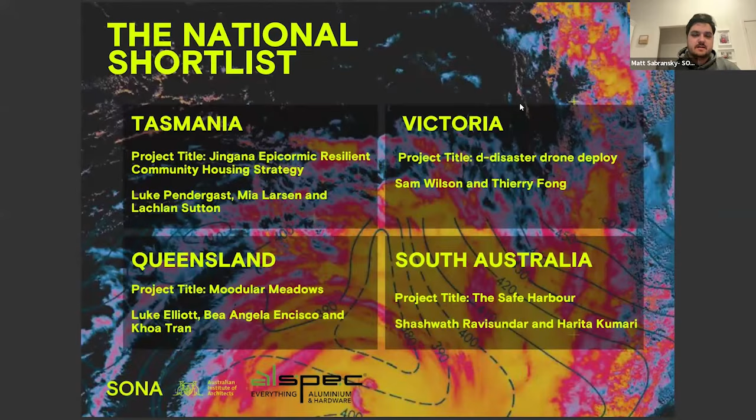From Tasmania, we have the Jingana Epicormic Resilient Community Housing Strategy from students Luke Pendergast, Mia Larsen, and Lachlan Sutton, all master's students at the University of Tasmania.

From Victoria, Project D, Disaster Drone Deploy, student Sam Wilson, a master's student from RMIT, and Thierry Fong, a master's student from the University of Melbourne.

From South Australia, we have Safe Harbour from Shashwath, Ravisundar, and Harita Kumari, master's students at the University of Adelaide. And finally, from Queensland, we have Moodular Meadows from students Luke Elliott, Bea Angela Encisco, and Khoa Tran, all students of the Queensland University of Technology.

The way that this session will run is each of the shortlisted teams will now have 5 minutes to present, plus an extended time of 5 minutes for jury feedback and Q&A. The order of presentations will be randomized, and following the presentations, the national jury will deliberate, so we'll be put into a separate room. If you could just hang around, we'll then come back to announce the national winners.

So our first team up to present is Tasmania with Jingana Epicormic Resilient Community Housing Strategy. I'll pass on to the students from Tasmania. One thing I did forget to mention is, because this is a new way that we're doing it this year, we still haven't worked out some of the kinks. So to access your slides, just ask to go to the next slide, and Madeline from the Institute will flip the slides for you back and forth. Thank you.

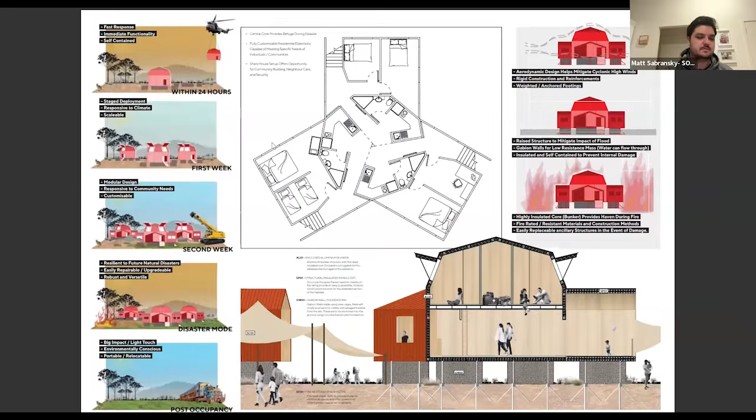Were there any other comments from the jury? No? Awesome. Great job. In that case, we'll move on to our next project, which is coming from Victoria, Disaster Drone Deploy.

Disaster Drone Deploy.

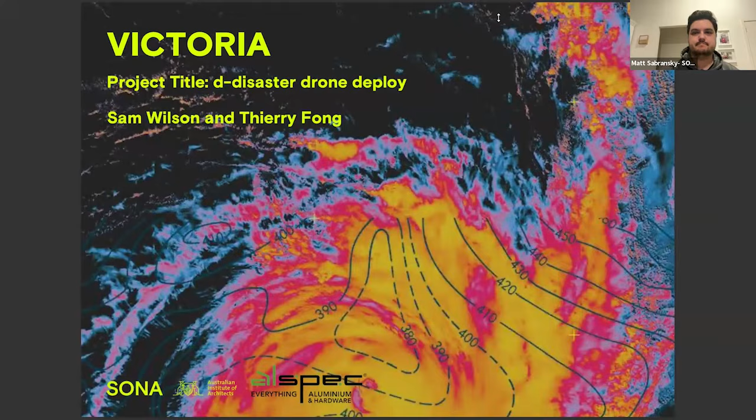Hello everyone, my name is Thierry and this is Sam, and welcome to our provocation, D. D rejects the conventions of architecture as a singular static object and looks to the dynamic and contemporary, the non-architectural typology of drones.

D posits a remedy to the adversity of extreme climatic events that manifests as a deployable system composed of airborne pods. D can be deployed anywhere to provide urgent shelter and emergency housing to displaced communities.

D is composed of one typology, symbiotically forming an accretive urban mass. D is a flock of birds, a school of fish, a hive of bees, restorative to the ecosystem, a system to remediate disaster-ravaged landscapes. The analysis of recent disasters above the Tropic of Capricorn determines Longreach as a location that bears all three of the scrutinized calamities.

On the traditional lands of the Iningai, Longreach is prone to regular flooding from the adjacent Landsborough waterway, the omnipresent threat of bushfire from the southwest Salton Creek forest, and the perilous westerly wind and developing La Nina.

A devastated family, despondent, desperate and dreary, no longer have a home, their livelihood lost to the forces of nature. As they arrive at Longreach to alleviate their displacement, they see a swarm of drones simultaneously arriving. Hope is inspired. They will have a roof over their head tonight.

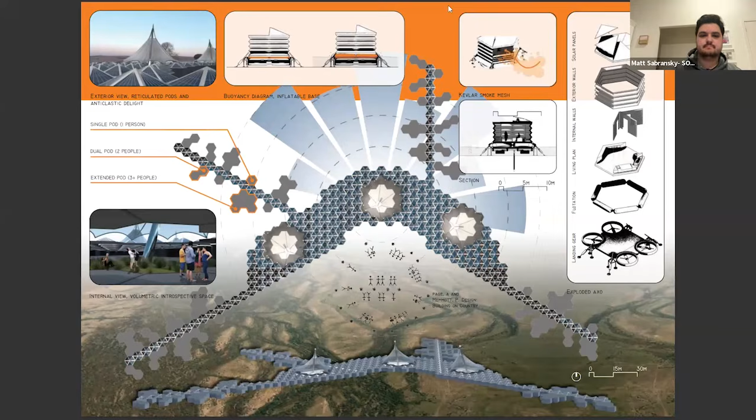Thank you. Again, I'll pass on to my national jury. I'll start. Can you hear me? Well done, I think.

It's a really innovative concept. One of the things I wanted to ask about, similar to the previous question I had for the other team: how did you come up with the form in response to the logistics of a flyable object? In terms of the form, the hexagonal shape was driven by a biomimetic approach. We looked at the analogy of a hive of bees or insects, and the hexagon as a form is easily tessellatable into the overall spatial arrangement of the site. In terms of aerodynamics, the multiple edges along the hexagon mean that typical drone components, such as the four turbines and the flotation devices borrowed from a lunar capsule, can easily be placed. Those were the main drivers for the form.

When these hexagonal forms come together, they orient themselves in a way that creates shading and a windbreak on site. The idea is that wherever these drones are deployed, their form can change in response to the windrose data, so it's dynamic and depends on site. But in terms of Longreach, this is the configuration.

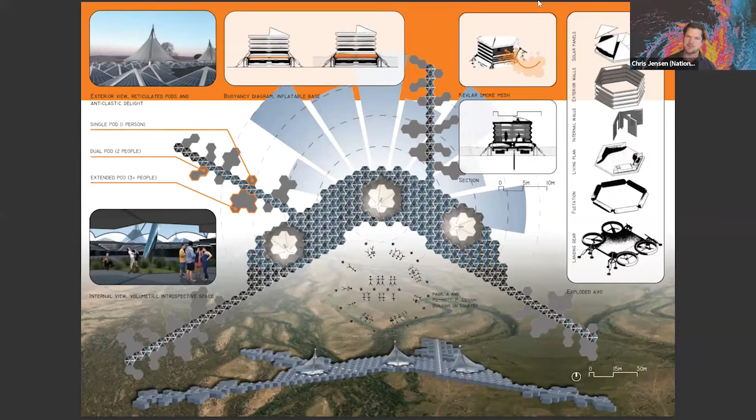Very creative. I'm wondering, did you consider the possibility that the drone would deploy the accommodation and the actual drone itself would return somewhere? The reason I ask is that's probably the part most vulnerable to further extreme weather events, so I'm wondering if that was considered in the design. Is your question whether an alternative would be the drone deploying the living unit separately and then departing the site?

So if you look at the illustration on the right, the base, which is the drone, I just wondered if you had a thought of it being to deliver the habitable structure and the drone part returns. I was just interested if you had a thought of that as one of the possibilities, that's all.

Yeah, we definitely went through different ideas during the design process of how this deployable system would operate. We settled on the idea of the drone being a comprehensive living unit because we wanted to integrate resistance to different disasters throughout the entire form of the drone, from the landing gear also being a structural element to elevate the drone above the floodwater level, to aspects like the turbines folding in. As Thierry said, this is as compact as possible, but the entire creation actually depends on how many people require the pods, so it can change in size instantaneously.

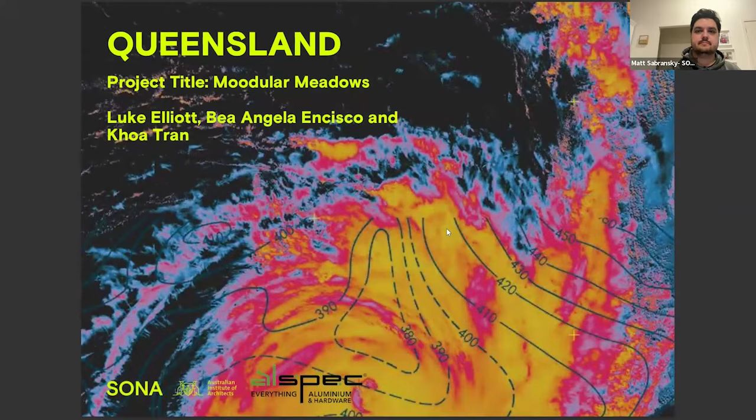Hello everyone, we are T-Lab. I am Bea, this is Luke, and this is Khoa. Situated just north of the Tropic of Capricorn is the regional town of Rockhampton, where our communal modular hub, Moodular Meadows, resides. Rockhampton is home to the Darumbal people, with a significant family demographic and ample livestock, resulting in many people relying on cattle for a living, naming it the beef capital of Australia. Given the coastal location of the site, Rockhampton locals are often affected by harsh cyclones, torrential rain, and extreme bushfires throughout the year.

To combat this, we have been inspired by the Darumbal people's symbolic water lily to reimagine emergency housing by not only catering to the physical needs and wants of families, but also their emotional and psychological comfort. Growing up around the area, we wanted to emphasize the communal and gathering components, like the water lily, as we understand that in critical and emotional situations, regional towns often rely on each other to get by. So modular pods are customizable through meadows of 4, 8, or 12 people.

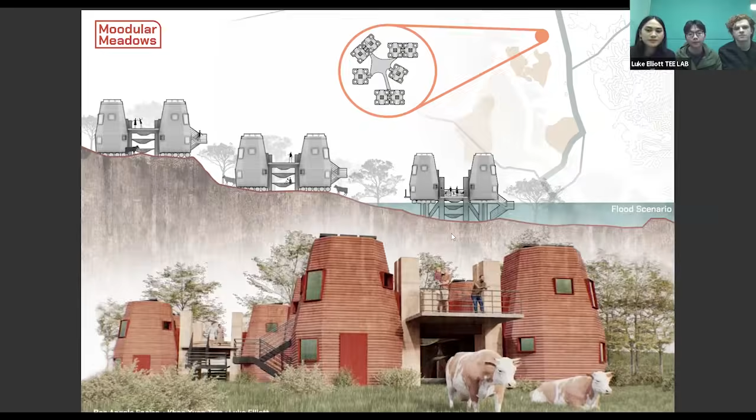The pods can accommodate family or couple lifestyles, pet accommodation, produce growing, and even livestock care within the rural villages through the customizable rooms. Communal gathering platforms where families can spend time and gather. There are also nets in the center for seating or as a quick escape for emergency situations.

We refuse to have an anthropocentric design, as we believe that animals are just as important as humans to connect on sacred Darumbal land. This includes the locals' livelihoods, where many farmers rely on the iconic Brahman bull to make a living. The effects of spontaneous weather conditions mean that livestock are often disregarded in emergencies and left behind in critical situations. We envision that even in the worst situations, families and farmers will have the opportunity to protect even a fraction of their pets and livestock, as opposed to none at all.

The Brahman bull's resilience has inspired us to develop our concept based on their ability to adapt to extreme weather conditions, withstanding heat up to at least 103 degrees without harm. What is also really resilient is cow poo. The large cattle population in Rockhampton results in a large amount of cow manure created.

We can harness this existing natural material to create a sustainable and resilient structure. We will create a composite material consisting of chemically treated cow patties to make them odorless, local soils, waterproof linings, and layers of insulation that will protect the cows and the people from the harsh winds, floods, and bushfires. The modules can then be 3D printed at the site much faster than any traditional building methods.

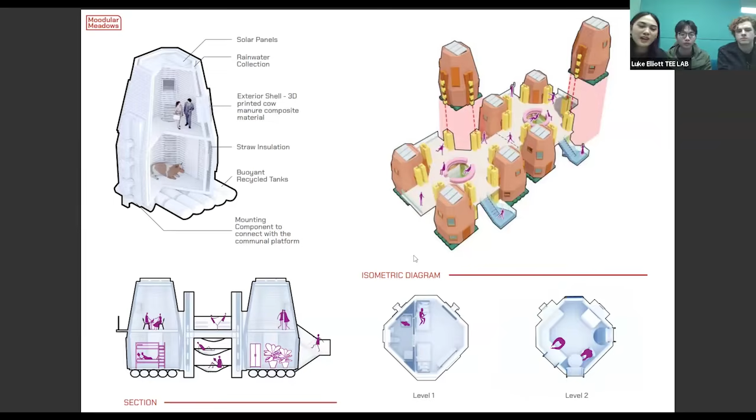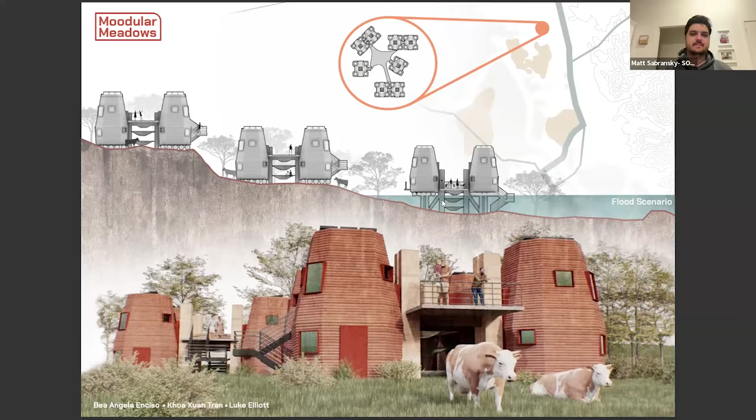Thanks, guys. And that brings us to our final team from South Australia, the Safe Harbor.

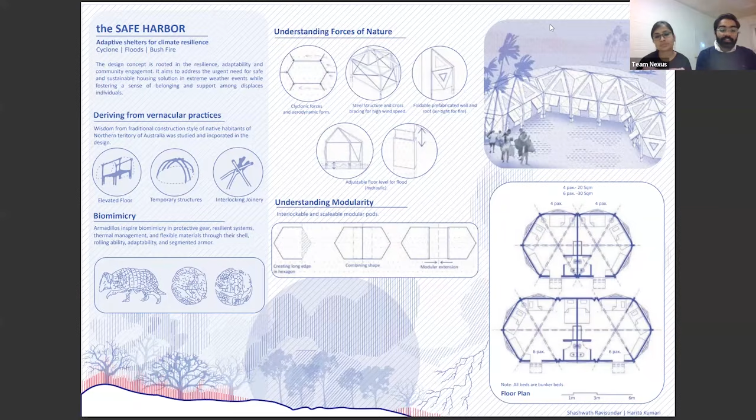Hello everyone, I am Harita and this is Shashwath representing South Australia at Nationals of the Super Studio hosted by Sona. We are both studying our masters at the University of Adelaide and excited to share a proposal for this year's competition. When we received the brief, Shashwath and I began exploring how mankind has dealt with natural disasters over the last 300,000 years. This led us to research the resultant architectural strategies of the Northern Australia's early inhabitants.

As shown in the illustration, we discovered that these communities elevated their homes to allow floodwaters to flow underneath, used aerodynamic forms to withstand cyclones, and created temporary structures for easy relocation. Crucially, the settlement patterns fostered a strong sense of community, enabling them to face disasters together.

But humans aren't the only ones with solutions, are they? The armadillo, for instance, curls into a ball for protection, inspiring a design of foldable prefabricated panels for easy transportation. Before we go any further, are you guys curious about the illustration below?

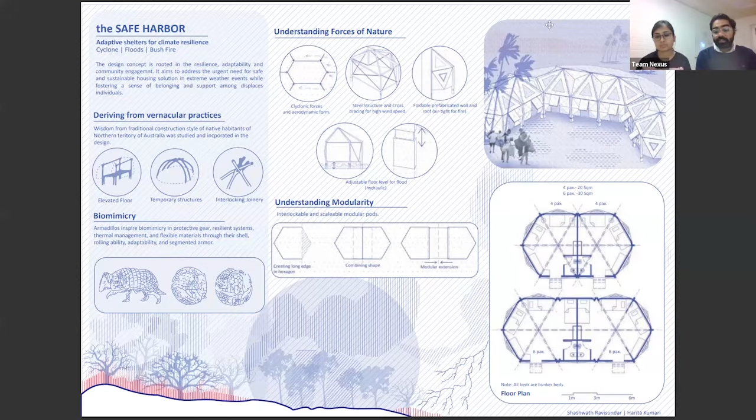We both were baffled to find out that in Australia, bushfires and thunderstorms can occur together. The intense heat from the fires causes the air to rise rapidly, forming storm clouds. These storms can produce lightning, which may ignite new fires and worsen the situation.

So going further into the design, understanding the force of nature was critical. We opted for symmetrical aerodynamic forms to counteract cyclonic forces with a steel structure and cross bracing for stability. The structure is designed for minimal ground insertion but strong lateral resistance. Rising floodwaters required adjustable floor levels - we incorporated hydraulic lifts inspired by car park systems to elevate the building, powered by solar panels on the rooftop.

We used foldable prefabricated panels for the roof and walls to achieve sealed joints. This helps in keeping out smoke as shown in the diagram on the left. The panels are made from cement boards with recycled aggregates and agricultural waste, reducing the carbon footprint. Foam insulation is used as a sandwich material between the boards to provide higher fire resistance.

For modularity, we chose an elongated hexagon split into two pentagons, allowing for expandable floor plans to accommodate varying family sizes. As seen in the plans, the modules can be used to house 4 people within 20 square meters or 6 people within 30 square meters. The design includes essential amenities like pantry, storage, and toilets. Most importantly, the structure symbolizes strength and comfort, ensuring a sense of safety. Next page, please.

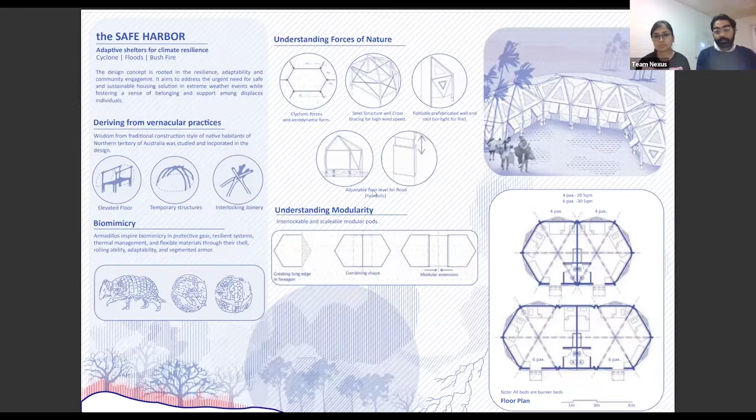So assembly is simplified for quick setup. A team of 4 can assemble the prefabricated kit in about 4 hours.

The rafter is connected to the telescopic column and is further attached to the base, forming the skeleton of the structure. Critical components like foldable beds and pop-up toilets are easily installed. The roof structure collects rainwater and all components fit into a compact, easily transportable box.

No skilled labor is required in this simplified process. This allows the inhabitants to create interlocked, scalable modules themselves and foster a sense of ownership.

We also focus on site selection for the disaster relief. As a demonstration site, we chose James Park Sporting in Cairns, Queensland, a region prone to multiple calamities. Being centrally located in Cairns, the site has existing amenities such as water supply, electricity, toilets, and floodlights.

The section through the site illustrates the wind shadow area between the bund and the trees as natural wind barriers. Furthermore, we ensure that the slope gradient of the site doesn't exceed 2 to 5%, ensuring a gentle slope to take away rainwater. These factors made it an ideal location for the community.

Fostering hierarchy of open spaces, the clusters are organized around a central shared space to encourage communal healing and activities. The organization of clusters is inspired by the hive of bees, with over 4 clusters. Each cluster houses 25 people, establishing a settlement of around 100 people. The community is anchored around a central hub providing showers, lockers, and a kitchen and dining space.

Again, I just have to say congratulations to everyone for getting this far in the competition. It's really, really exciting. So just to reiterate what's on the line here, our winning team will take home a grand prize of $3,000 thanks to our sponsor, Alspec, and new to this year, have their project featured in the next upcoming edition of Architecture Australia, which is awesome. To announce the winner, I will hand off to Alison Stout.

Thank you, Matt. Firstly, I'd like to say that this wasn't easy, and all of you here need to know that your submissions are exceptional for different reasons. We wanted to say something positive about each of them, so you understand that each of your submissions genuinely did impact us and give us positive vibes. So in no particular order, we wanted to talk about the Victorian presentation and its incredibly innovative approach. We really think you should send it to Elon Musk and see what you can get back, because it's absolutely incredible.

Again, in no particular order, I'm just jumping around the list. South Australia, we really, really liked your pragmatic and fully refined submission. You thought about everything, the fact that it was buildable and linking that back to country, and the place you wanted to build in was very climatic and sensitive.

Queensland, we love 3D printing. The jury absolutely loves 3D printing. And we really liked that you considered all of nature's beings. So keep doing that. Don't lose that as you move forward as architects, please. Don't lose that part of you.

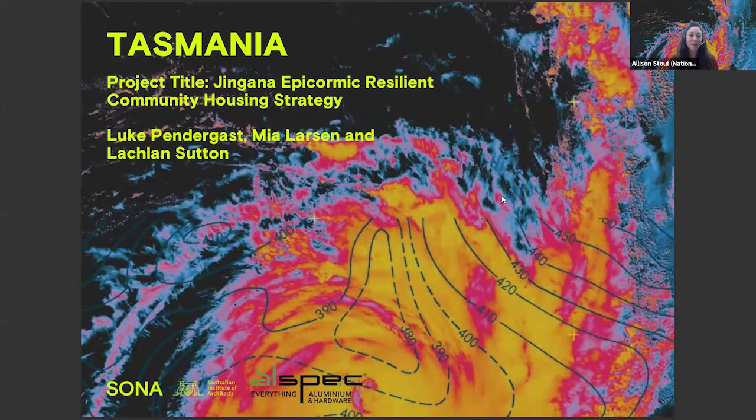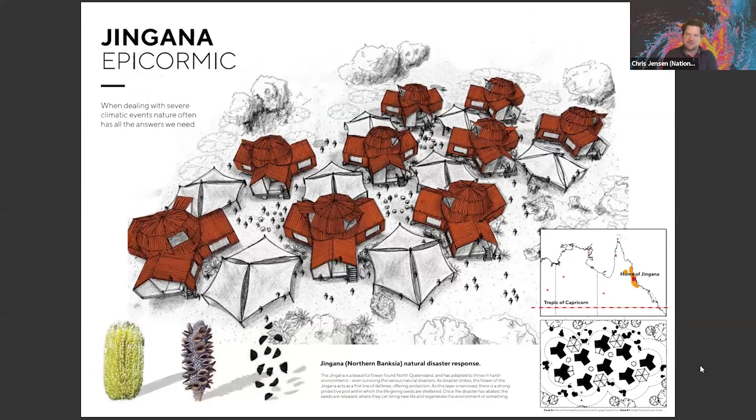Congratulations, everyone. Please go celebrate, because you all made it further than 120 plus other students. Well done, guys. I was personally blown away when we were shared these final four. It's absolutely amazing and very impressive, the work that you managed to do in a week, as well as the concepts that you've come up with. So thank you for sharing it with us.

Thank you so much, thank you. Well done to all the other teams as well. We're so humbled and grateful for this opportunity. So thank you, everyone. Yeah, thank you so much. Congratulations. Keep being amazing, all of you. Congratulations, guys.

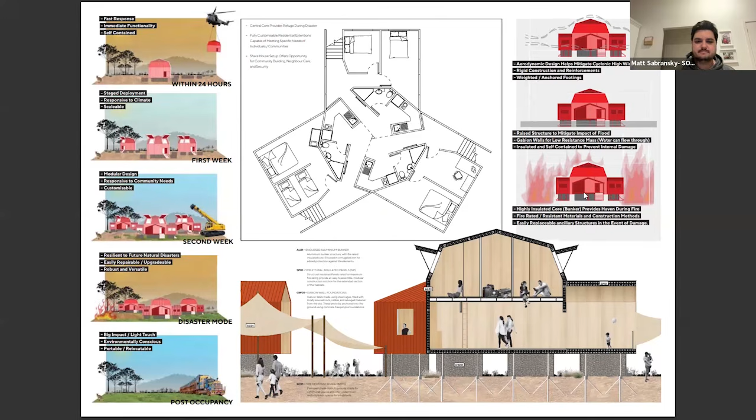But aside from further congratulations, this concludes Super Studio 2024. Massive congratulations to the Tasmanian team, and a big thank you to the rest of my national jury. Congratulations, everyone, well done on your amazing work.